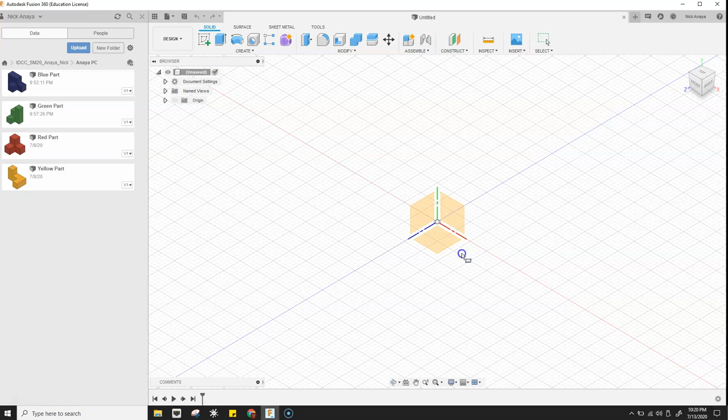Now we're going to work on the orange part. For this, I'll right click, pick sketch, go to 2-point rectangle, then select this plane. Start at the origin, click, move up and to the right, type 1.5, tab 0.75, enter. Then I'll finish the sketch. Now I hit E for extrude, grab the arrow, and start pulling that.

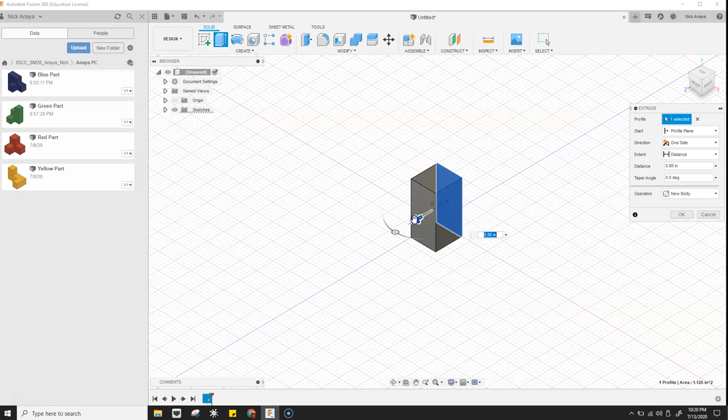1.5 will be the distance that I extrude this one. 1.5, enter. Now I right click and do a new sketch,

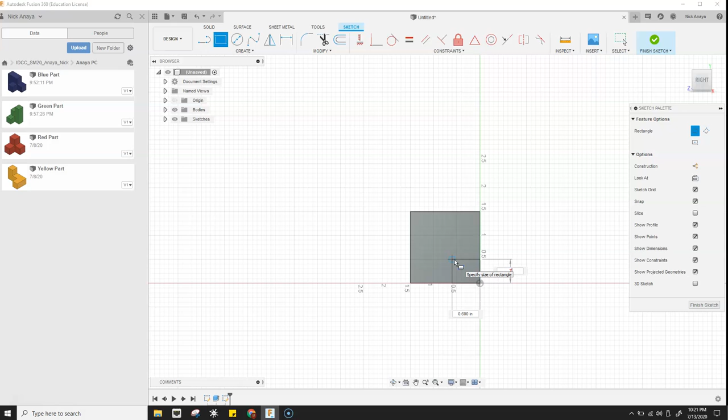and then go to my rectangle, 2-point rectangle, start at the origin, move up and to the left, type 0.75, tab 0.75, enter, and then finish sketch. Then hit E for extrude, select that, pull that out, and then do 1.5, enter.

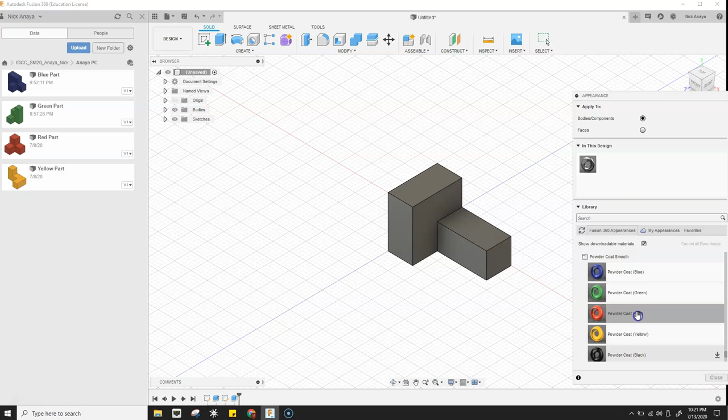Okay, now I hit A for appearance. I'm going to scroll down till I get to that red again. Even though this is orange, they don't have a red or an orange option immediately available. So what I do is click powder coat red, and then drag that over to the block.

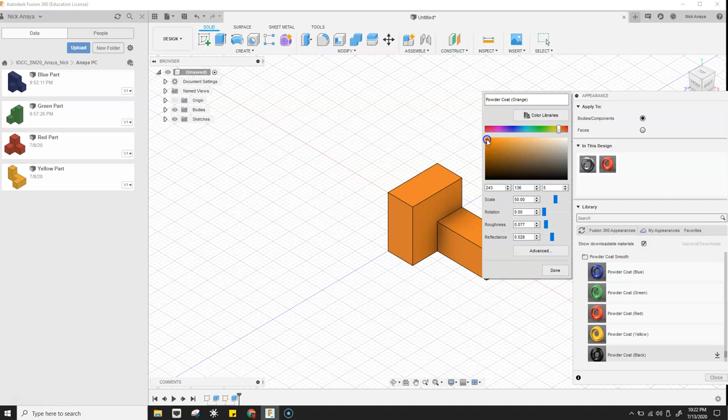Now up here, I can see powder coat red. I'll right click and click edit. So now I'm going to rename this to powder coat orange. And then I'll slide this over until I get an orange that I like. So probably about there. And then click done. So now I have powder coat orange, custom color.

And I'll go ahead and hit save. Call this orange part and hit enter.